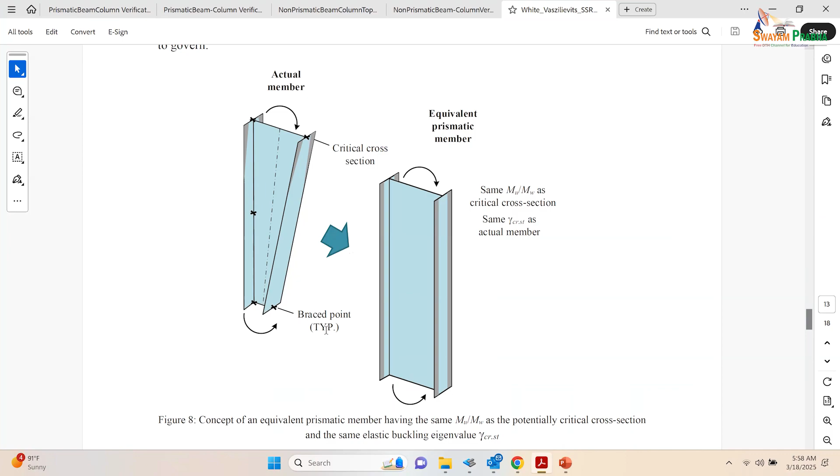We were just talking about this concept, so this graphic may help. Here's a hypothetical non-prismatic member subjected to bending moment, just showing bending moment here, no axial compression. It's got whatever bracing conditions, displacement, boundary conditions are coming in from the problem you're solving in general, and we need to identify a critical cross-section. Let's say we've got something like the member we've just been working on.

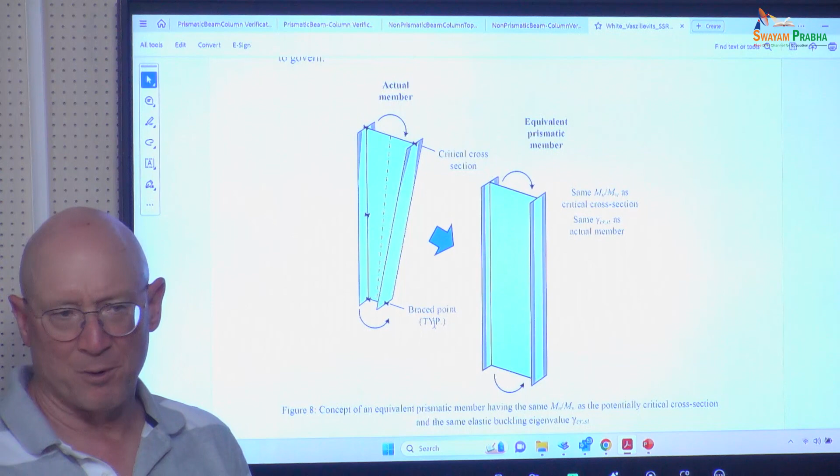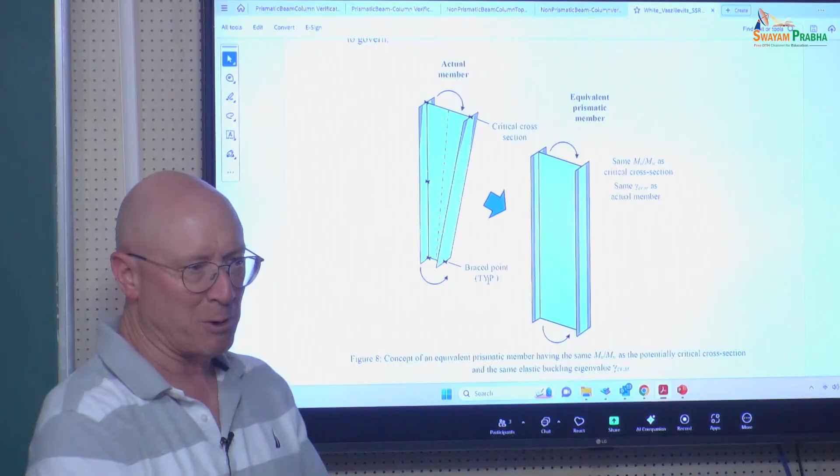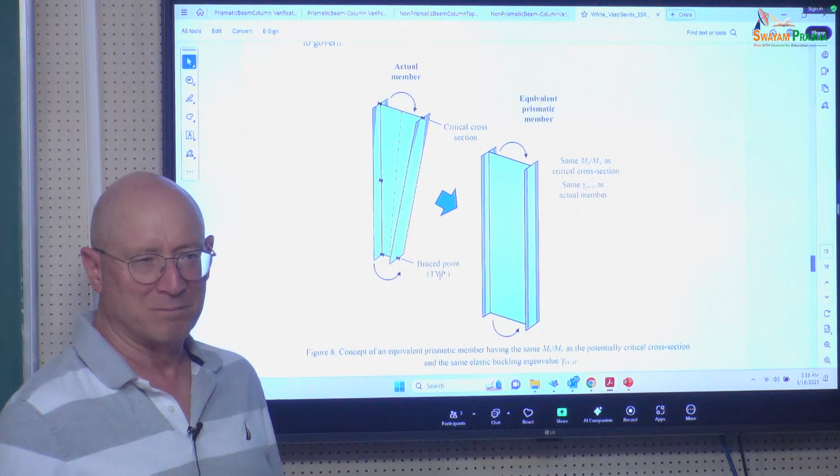We would expect that it's probably critical at the top. Now, in Consteel, we're using a rule where we're basically looking at the ratio of MU to MW for all the different cross sections, and we look at whichever one is largest. We take that as a critical cross section, move it forward, and that does a pretty good job of capturing the one that's going to be the largest.

In Design Guide 25, we would say, well, you've got these various potential locations that may be critical, please check them all. So once you identify a cross-section you're going to check, let's say you think the top is most critical here, you basically say, okay, what's the MU to MW at that cross-section? That's a cross-section demand to capacity ratio, or cross-section utilization if you prefer that term. Obviously we've got to do some calculations given that cross-section to calculate MW.

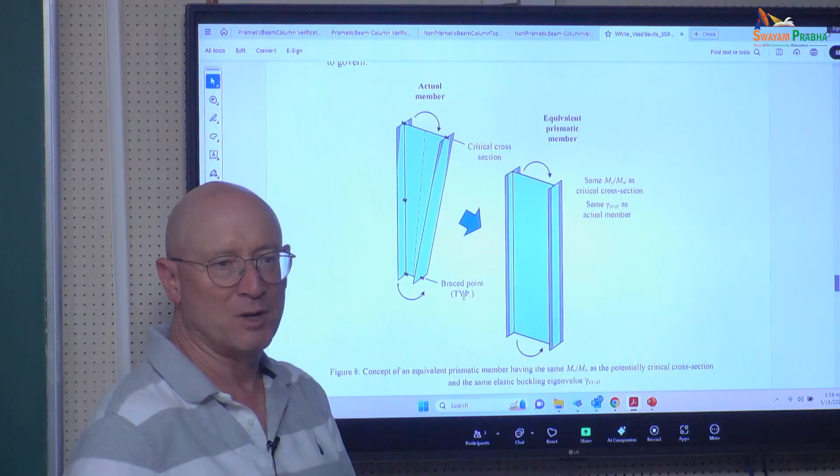That's the plateau strength we were talking about. We've also got an elastic buckling eigenvalue, gamma critical, that brings in the entire member. So you can see from what we just did, when we tapered the member, our gamma critical reduced because it wasn't as strong in terms of lateral torsional buckling.

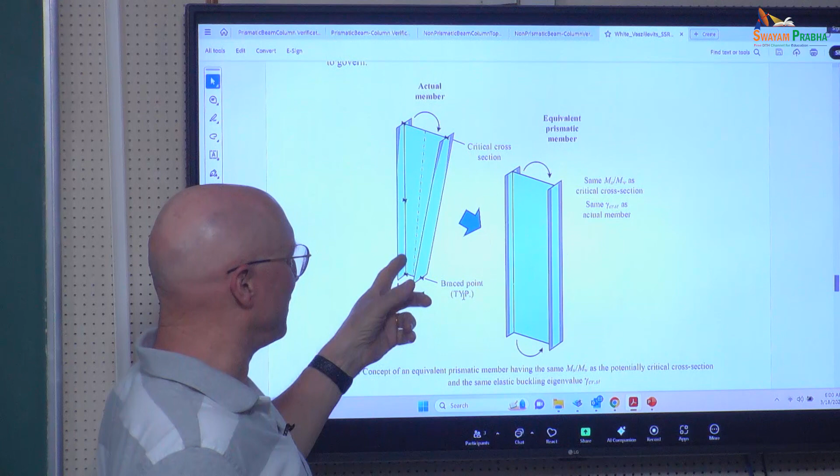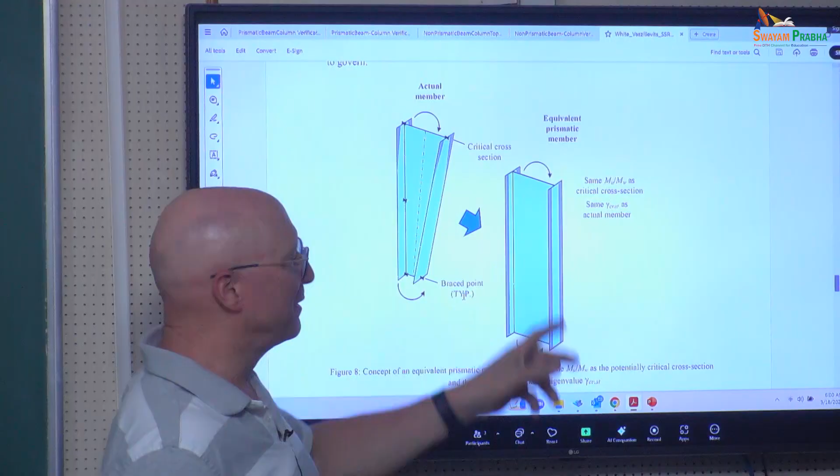Once you have those two parameters, it can be non-prismatic or prismatic. The way the AISC standard or other standards work, they're usually written just for prismatic members. So how do we use that standard if it's a non-prismatic member? Well, we can basically set up and show that if you're checking a prismatic member, if you know MU to MW, and if you know gamma critical, you've got all the information you need to calculate MU over phi MN.

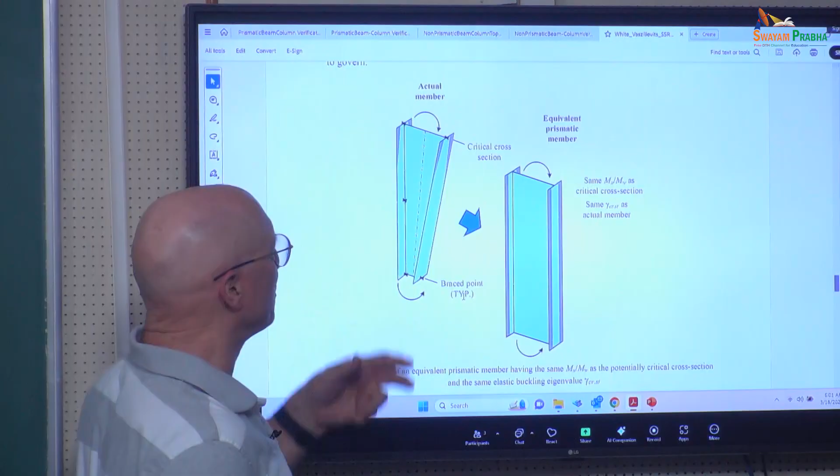That's how we can check a prismatic member. What's the equivalency we're going to use for a non-prismatic member? We go to a potentially critical cross-section, we determine the MU over MY at that cross-section, we get a gamma critical for this non-prismatic member, and then we're not going to try to define what's the length or anything of that sort in the equivalent member. We're just going to say we want to check whatever prismatic member has the same MU to MY and has the same gamma critical.

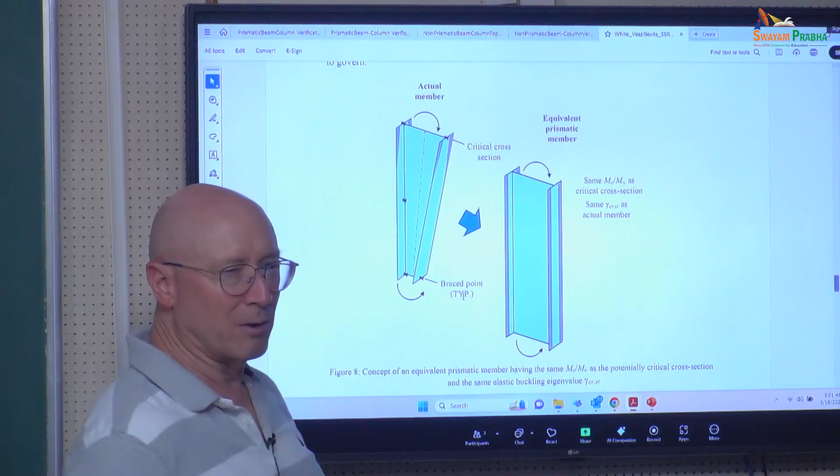That's how we apply the specifications, equations, to get a calculation for that cross-section. Then in general, we go to other cross-sections that might be critical, and we check those the same way. Does that make sense? It's a very simple concept, but it works quite well.

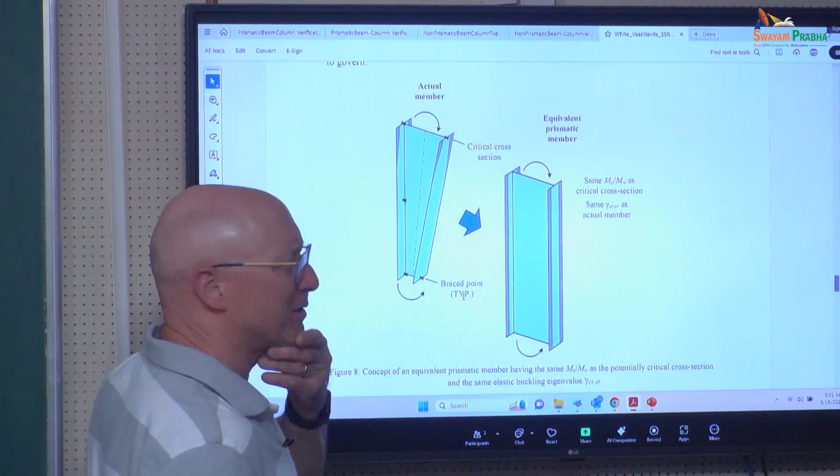I've been asked questions before, well, wouldn't that be conservative? You kind of maybe got something that's more local, large demand here, but the rest isn't so heavy of a demand. Wouldn't that be kind of conservative to now say I'm checking a member that's uniform? It actually works quite well.

So there's a general folder, and this is the 2025 paper by White and Vaszilievits. It's for the SSRC conference that's coming up.

Let's go back to Consteel for a second. So now we've got our prismatic member, and we have both axial compression and flexure. The axial compression is constant along the length. The moment is varying from maximum at the top to 0 at the bottom.

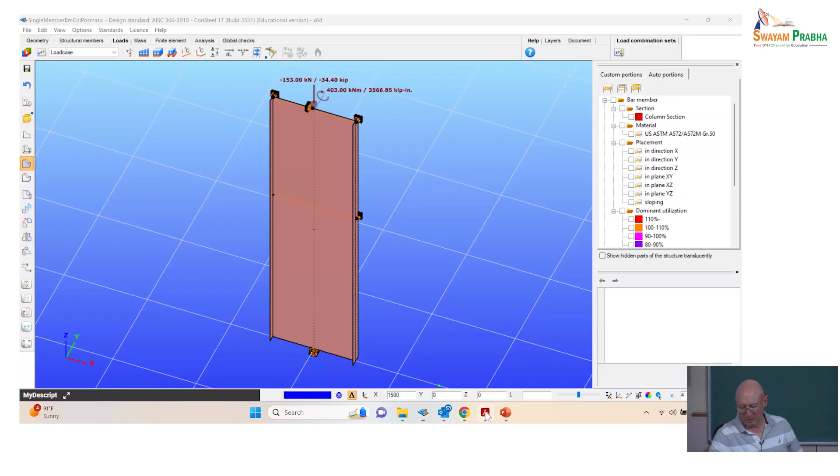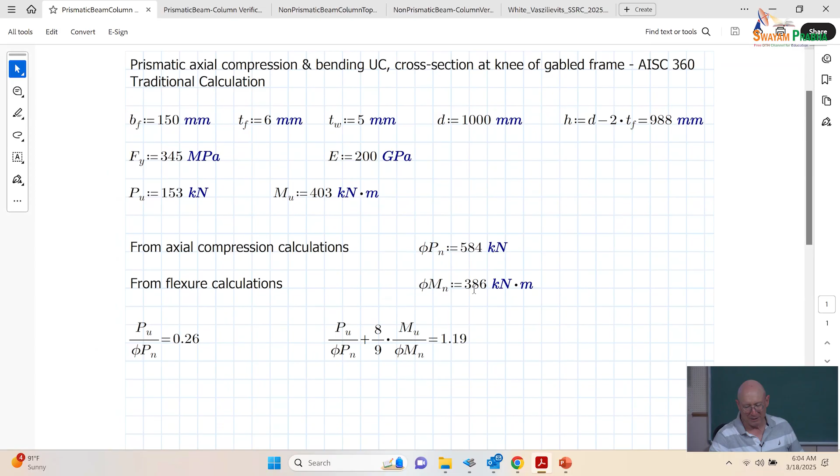So how would we verify the strength of this prismatic member? If we look at a traditional calculation - here's again the 1,000 millimeter deep section. We've already done the calculations for PU and MU and got a phi PN and a phi MN separately. Our PU over phi PN was 0.26. That kicks in the upper branch of a bilinear equation that we use for the beam column strength. We're at 1.19. That's the way we do it traditionally.

Now, if you stop and think about it, it wouldn't be that hard for something like this, where it's just a single isolated member that we've taken out from everything else. So now we're going to go through a lot of extra effort to analyze this member under pure axial compression. Then we're going to put in more effort to analyze it for just bending alone. Then we get those capacities, and then we can interact them. So that's the traditional approach.

Obviously, if you're doing hand calculations for those things, yeah, it's easy - it's difficult to do anything else. You want to know the column capacity by hand, you want to know the beam capacity by hand, now let's get an interaction that ties them together. But if we're using a tool like Consteel, that's extremely awkward. It's like, wait a minute.

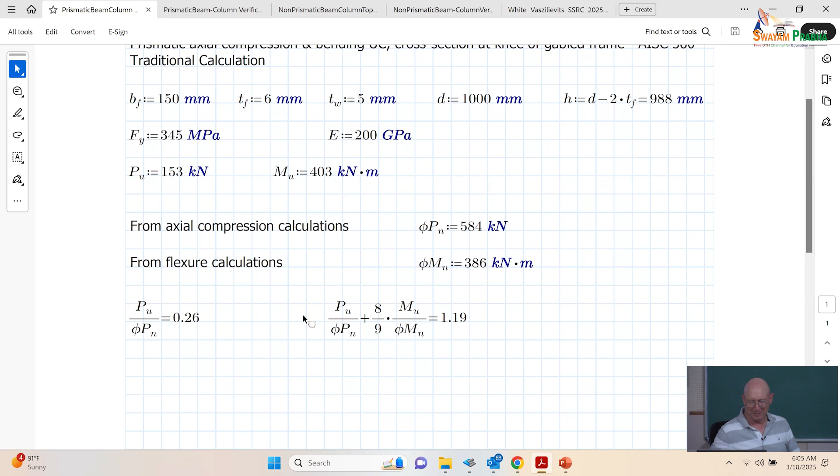If we've got combined axial compression and flexure, why don't we analyze combined axial compression and flexure? Why are we doing them separately?

So let's analyze them. We run the analysis, and this is a buckling load. It's buckling at 3.85 of the design load for these two loads that are applied. It's a lateral torsional buckling under combined compression and bending, and an eigenvalue.

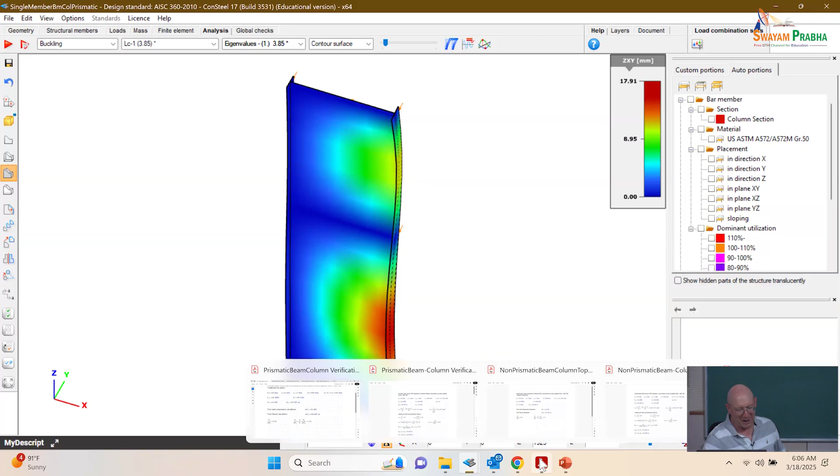All right, how do we do a design with this? How can we use that in design? The general method. So now what I want to show you is basically how that works, and then we'll do a summary. This is for just the prismatic beam column. We can then look at it for the non-prismatic case.

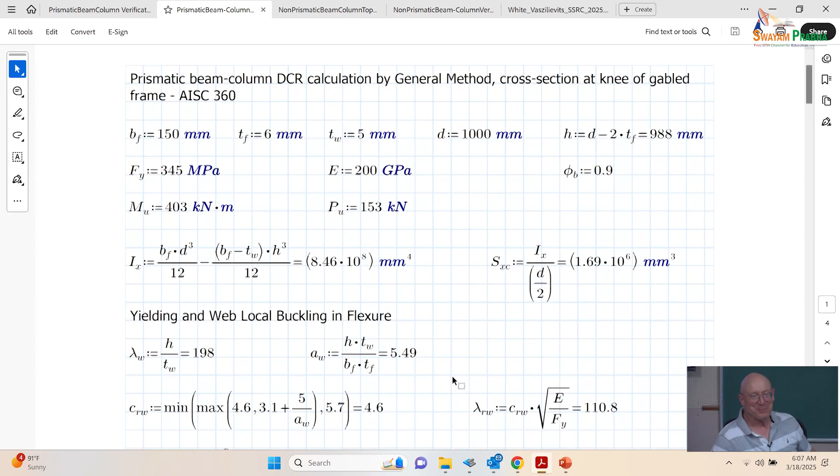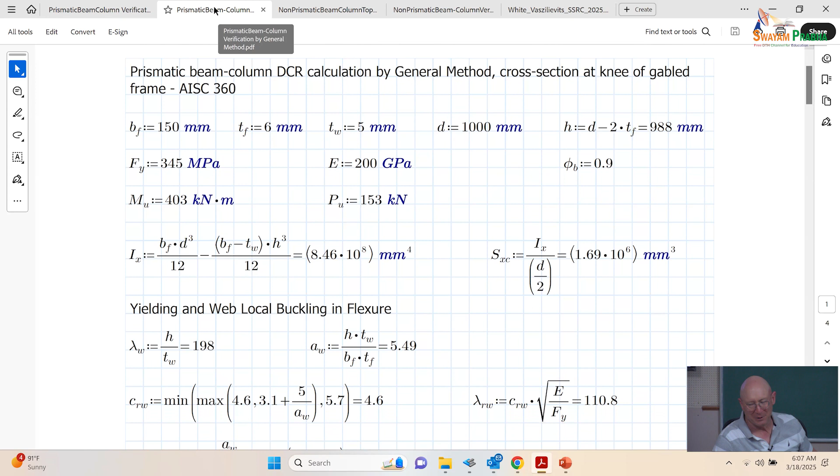The calculations should be starting to look rather familiar at this point. You say, boy, I think I've seen that on a previous PDF. So this is prismatic beam column verification by general method, in the folder that's for Module 4, Behavior and Design of Beam Columns and Frames.

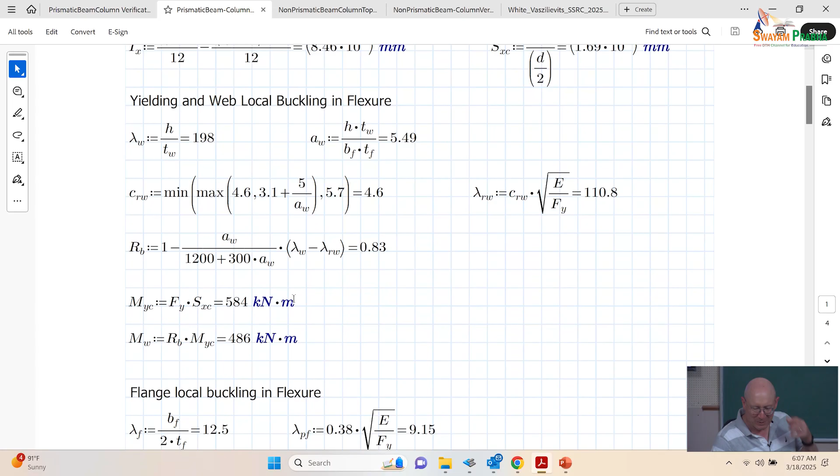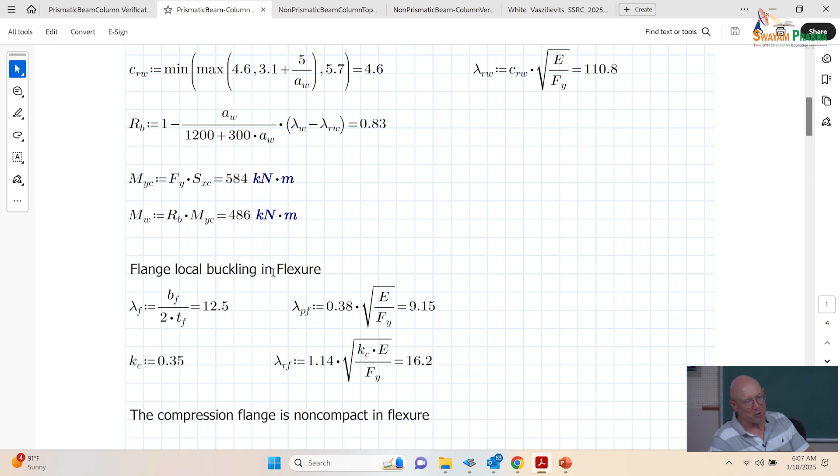So we got some section properties. That's nothing new. We got our lambda W, our A sub W, we got our CRW - that's the same calculations we were doing before. RB looks like that's 0.833, I meant to do 3 significant figures there. That's pretty much repeated out of what we have already done. It's not that we're going to redo all those previous calculations here - let's say you're doing them for the first time here.

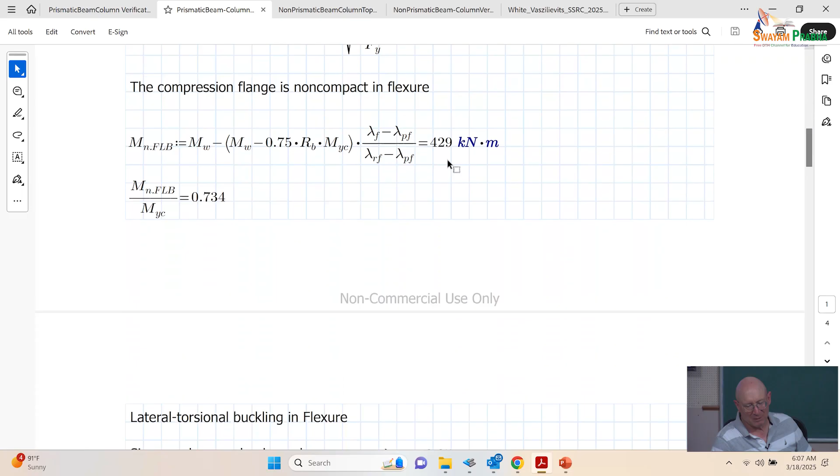Flange local buckling in flexure - okay, this is the same as what we looked at before, 429 for the flange local buckling strength. Lateral torsional buckling in flexure - okay, same lambda P, ML, lambda RLT, that's the same.

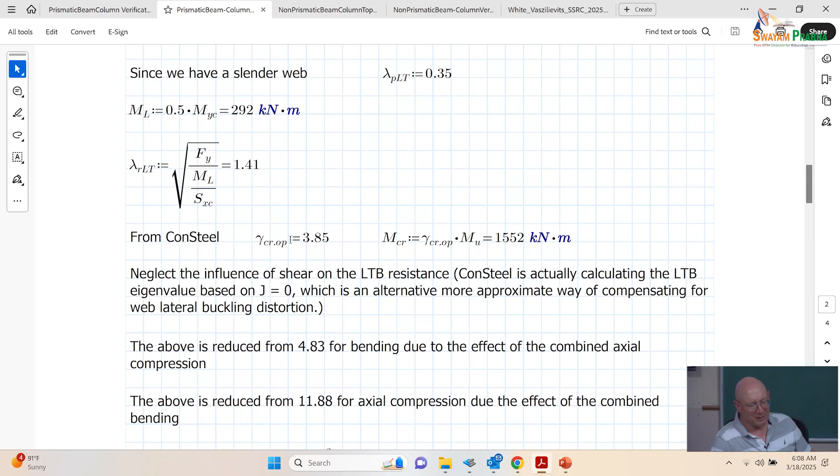Wait a minute. Was it 3.85? I hope it was. Yeah, 3.85, okay. So my gamma here is a gamma from combined compression and flexure. I'm multiplying my mu by that, so I got my mu at the strength condition. Now again, here we're using the approach that proceeds where we're going in the direction of always doing everything with a J, but then having to calculate a reduction factor for shear.

So that 3.85 - it was 4.83 when we just had bending alone, and it was 11.88 when we had axial compression alone. I think that was an earlier thing, and I changed it a little.

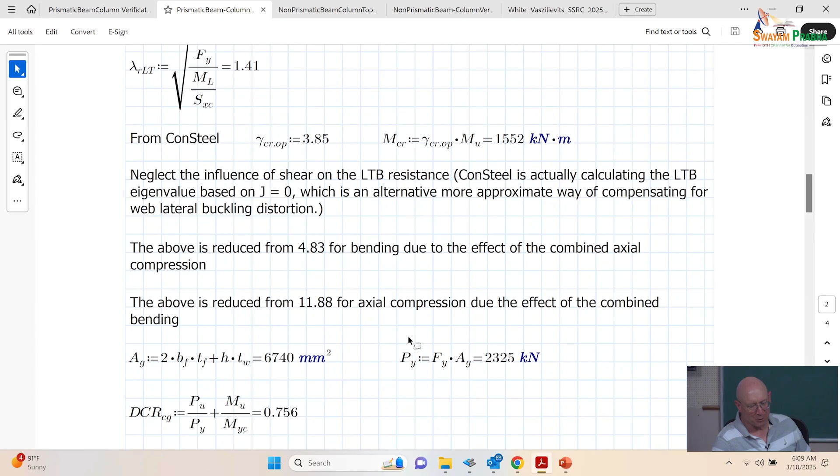All right, so we're not quite done. We need to basically also get our M criticals, given our load corresponding to critical load - we need to figure out the demand to capacity ratio under combined compression and bending.

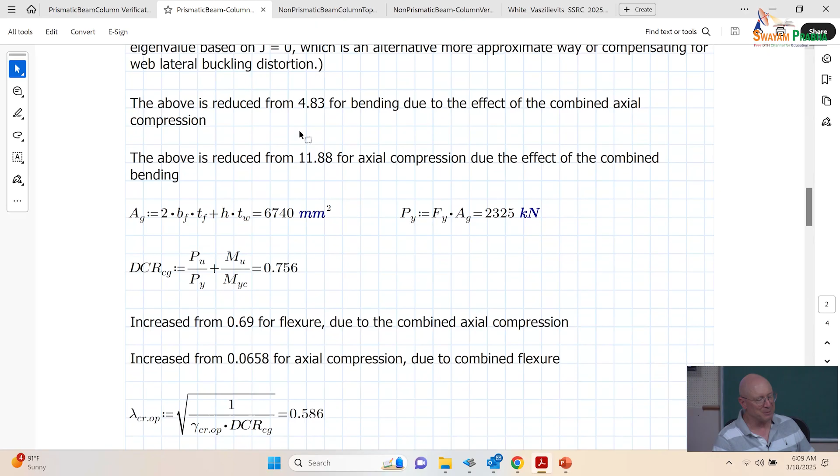So to go there, here's where I'm bringing in - okay, I've got a yield moment. I need to calculate a yield axial load. Py is Fy times the gross area. Okay, so we're going to get a gross cross-section demand to capacity ratio. Basically, this is a yield equation, right?

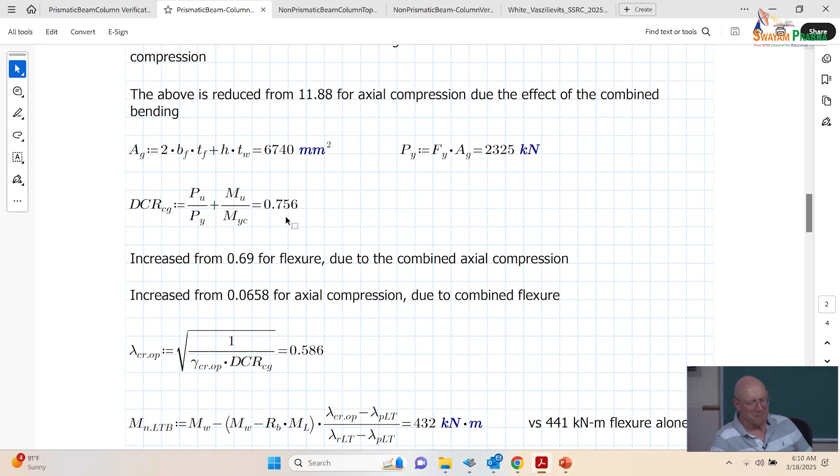This is increased from 0.69 for flexure because we've added axial compression. It's increased from 0.0658 for axial compression due to the fact we've also got bending.

Now we calculate an out-of-plane non-dimensional slenderness using our elastic buckling eigenvalue, gamma critical OP, for the out-of-plane buckling, and our demand to capacity ratio for the gross cross-section. So I've shown you that form of it earlier. We need to use it in this form now to cover the bases with the combined loading.

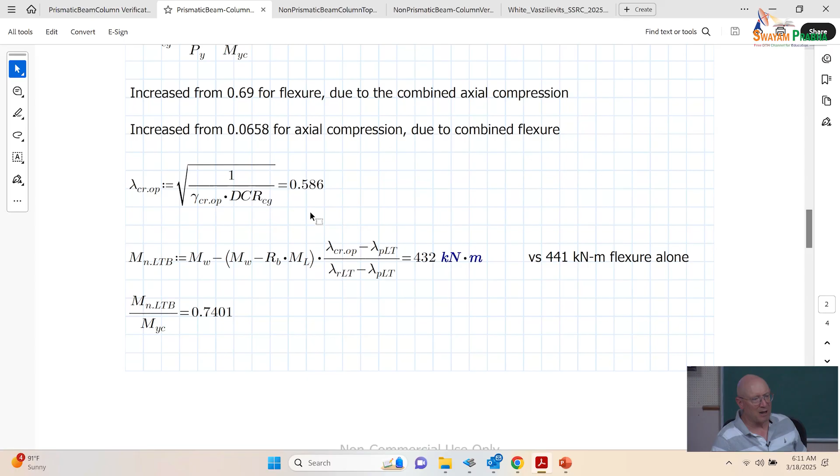We got 0.586. So now that slenderness is used in both the flexure calculations for lateral torsional buckling and the column strength equation for the column axial compression. So when I go to the LTB strength, I've got a lambda critical OP here where we had lambda LT before.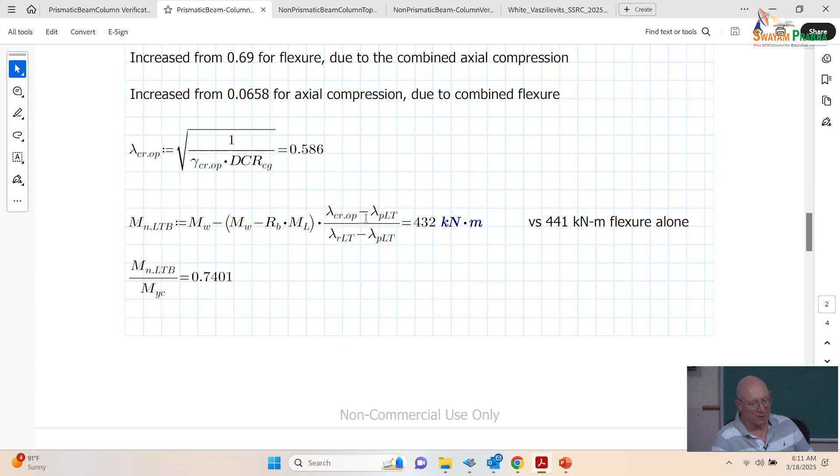So that's 432 now, where it was 441 when I had flexure alone. The ratio to MY is 0.74, if I just look at it as moment to MY. Here's my phi-M-n, which is the minimum of these. Now I thought I had... yeah, and I've got, I think - oh, this one's prismatic, so I didn't need to do that. Let's go to non-prismatic.

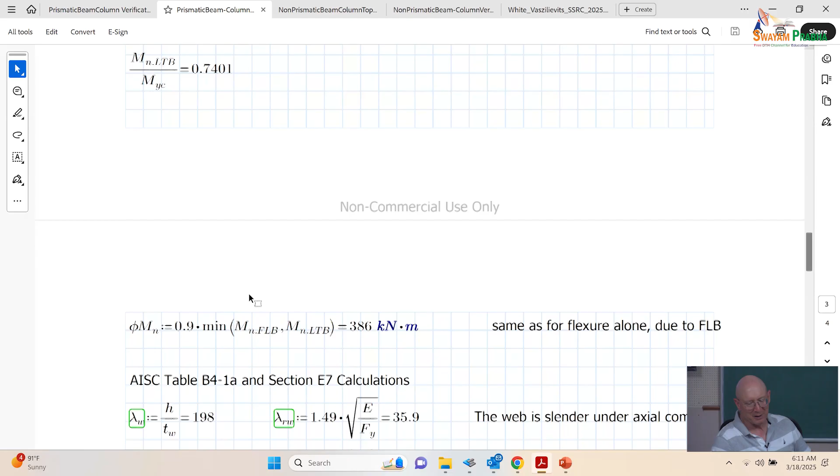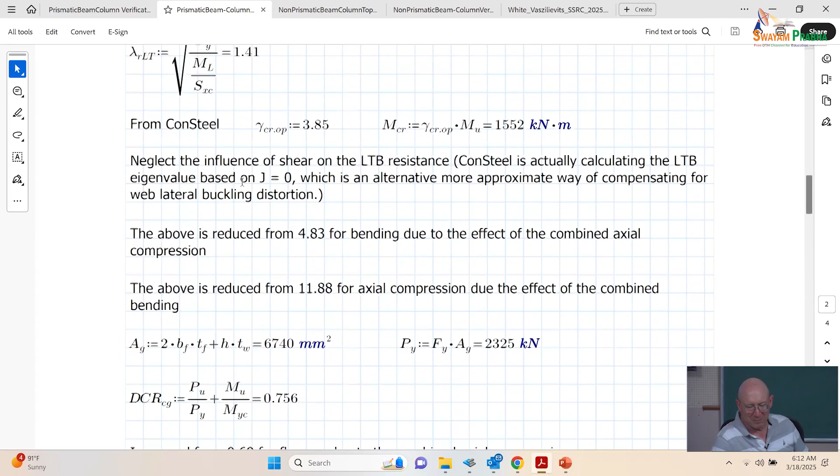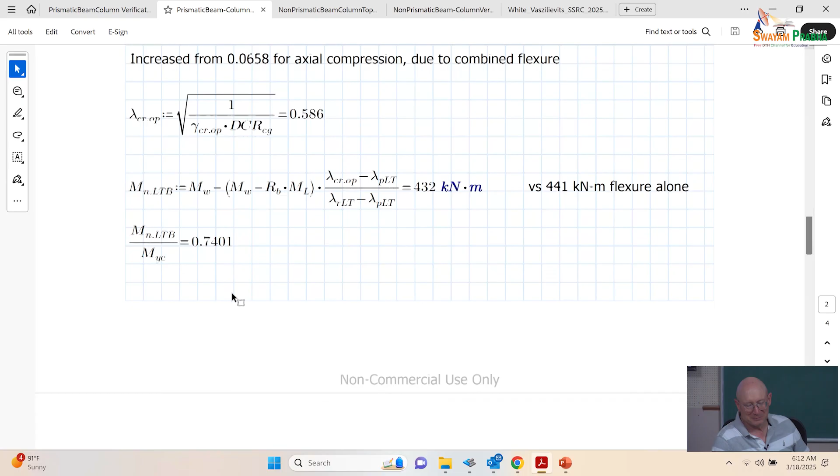Well, no, we still could have checked - still could have shown you where we are with respect to flange local buckling. So if I scroll up here, flange local buckling to MY was 0.734. And now we've got a lateral torsional buckling strength - that's okay, it's 0.74. So flange local buckling is still just barely controlling for this prismatic case. All right, so that's the flexure.

Now we've worked the column strength calculations. Again, we get a P critical out of plane by multiplying the eigenvalue by our PU. So now this is the axial load at elastic buckling.

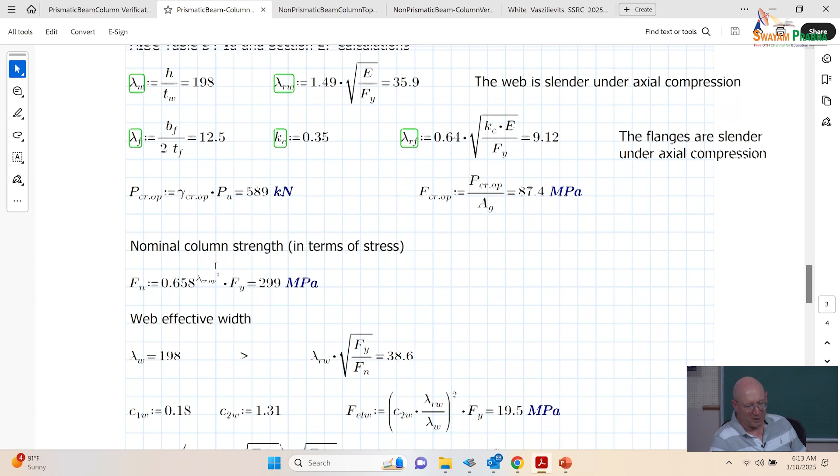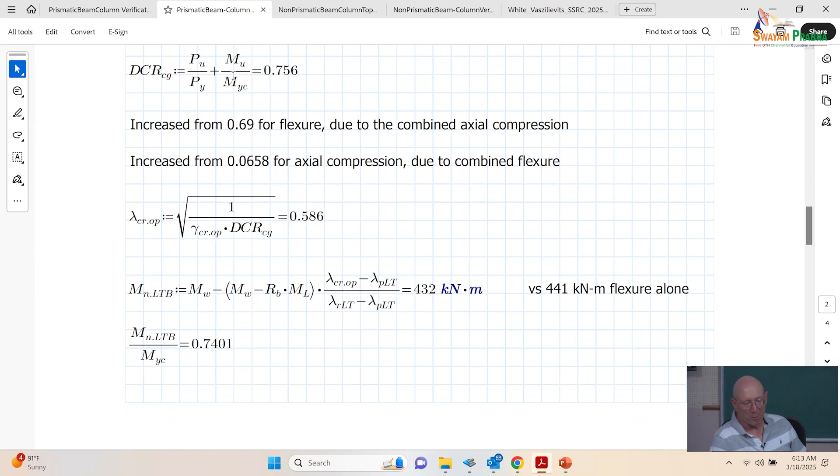We've already got our lambda critical out of plane. We did that above when we were doing the check based on this cross-section demand to capacity ratio that incorporates axial and bending. So we carry that into the column strength equation.

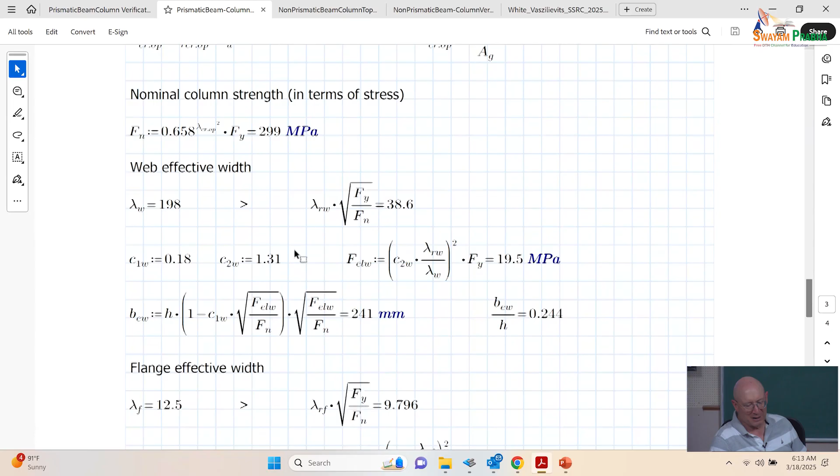And so now we get an Fn, then we use our Fn to calculate our effective widths, and we get an effective area. We get our column capacity. It's now 744. It was 584.

And then we now can take our phi-m-n and our phi-p-n that we've just calculated. The Pu over phi-p-n is larger than 0.2, so this form of the bilinear equation applies. We get 1.13 versus the traditional check, which is 1.19.

Now in the traditional check, we usually take the demand to capacity ratio Pu to phi-p-n, and if you go back and look at what we did, it was at the very bottom of the section. And now we say, oh, but the moment is up at the top. Do we really think those are that closely related?

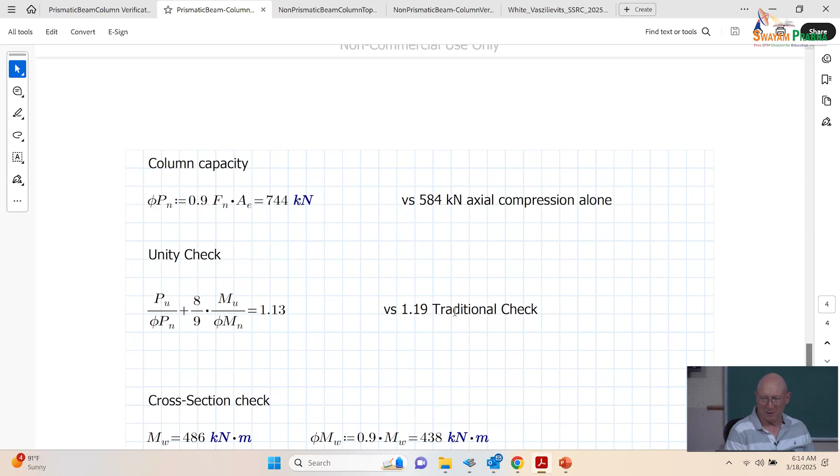And so that's a loose argument for why the general method is giving you a better representation, and it's allowing you to take advantage of various attributes where, with a tool like Consteel, you can capture various continuity effects in the structure and various complexities of the geometry.

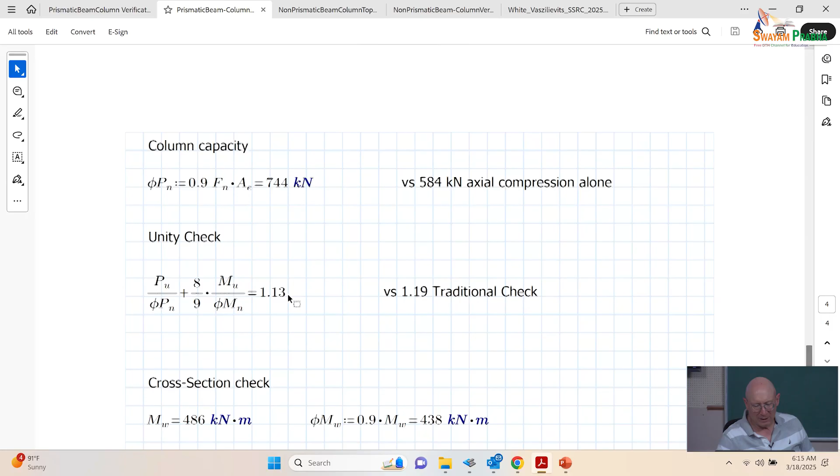Now in terms of the cross-section check here, again it would be an MW for the flexure and a PNS. PNS is based on the effective area that we get using an FY basis for effective widths.

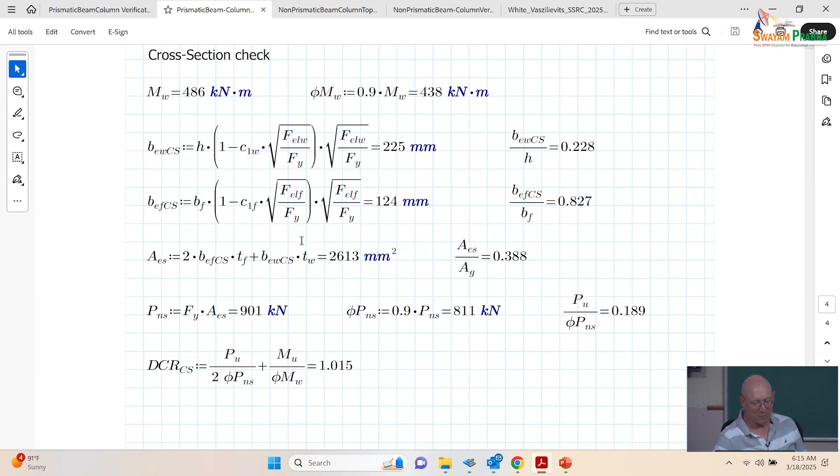And so in Consteel, the calculation is looking for basically calculating this for all the cross sections throughout the structure, and then identifying where the cross section demand to capacity ratio is largest for a given member. We go there to then do the member calculations.

So that's prismatic. And I think maybe before we look at the non-prismatic, it may be good to basically walk you through what we just did, but more in a presentation form of the steps.

Step one is generally we're going to perform an in-plane geometric nonlinear second-order elastic structural analysis with imperfections or equivalent notional lateral loads.

Notional loads. Now, per AISC 360, they say, okay, that means use the direct analysis method rules for the analysis model. And so the mantra there is a 0.8 stiffness reduction on all elastic stiffness contributions, and if it's a frame, out of plumbness of 1 in 500. That's the erection tolerance, maximum erection tolerance on out of plumbness in a frame. And if we get into some other things, we might need to talk about out of straightness and so forth.

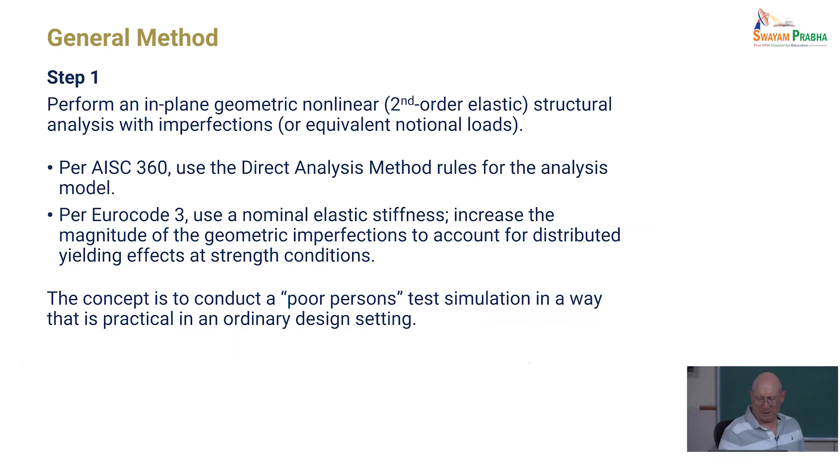So once we have step one accomplished, we move to step two. And so with the way that it is implemented in Consteel, we determine cross-section demand to capacity ratios throughout the structure. And we identify, the designer identifies, okay, I want to call this a member, this a member, this a member. And then we look at, well, where is the largest

DCRCS, so that's based on PNS and MW. PNS is based on effective width based on FY, okay, same as in Eurocode. So we identify a critical cross-section based on that, and we say, okay, we've got our critical cross-section now, we're going to do our member check just on that cross-section. Whereas Design Guide 25 would say, oh, you may have these 4 or 5 cross-sections that are critical, please check them all for the member.

Now, in the calculation of the non-dimensional slenderness of the member, we need a gross cross-section DCR, so that's the bottom here, DCR CG, for G for gross. So that's step 2.

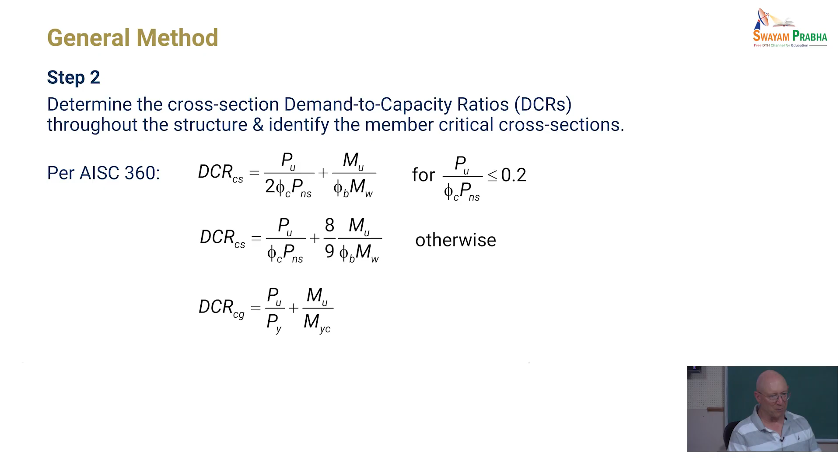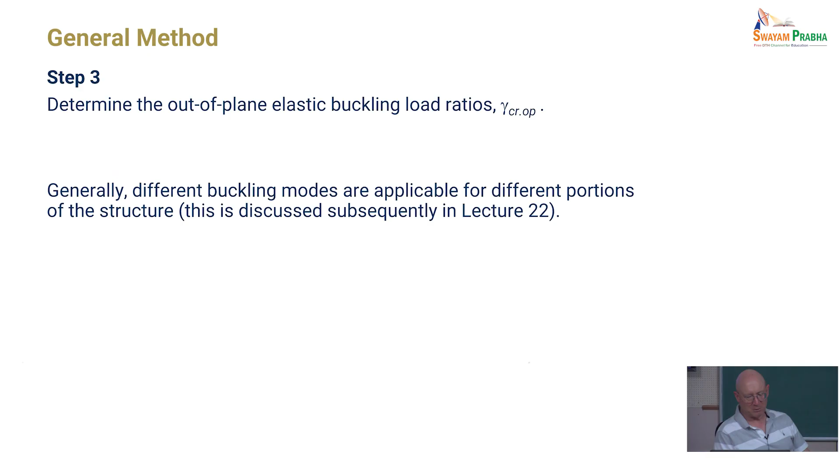Step 3, we determine our elastic buckling load ratios for out of plane. And so generally different buckling modes are applicable for different portions of the structure. And so Balint is going to discuss that in a subsequent lecture, how we deal with that.

Then step 4, we calculate the applicable member out of plane non-dimensional slenderness values. So I've got lambda OP, or lambda critical OP, square root of 1 over gamma critical OP over my DCR for the gross cross section. So given that, that gets entered into the Pn equations and the Mn equations, and we get axial compressive and flexural strengths.

And now we're ready to wrap it up. We calculate the member demand to capacity ratios, and per AISC, we use this bilinear strength interaction equation.

In the bridge standard in the US, with the fairly major updates we developed there for handling big box sections and all kinds of things, quite honestly, the bilinear equation in AISC 360 is a bit of a cheat when it gets to cross sections with very thin webs. The better interaction equation is really just the linear interaction equation for that, and we're pointing that out in the paper I was showing you the figure from earlier in this session. It's pointed out in the bridge standard that if you've got a slender web, you should use the linear interaction equation. It's not a big difference one way or the other.

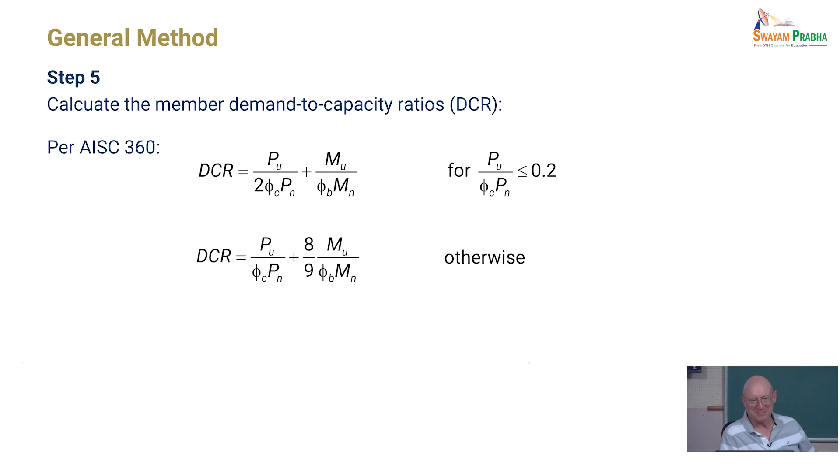So there's a lot of these things where it's easier to just keep cheating. It doesn't change it that much, and I can't have another argument with you about it. Okay, so that's it. That's how the general method works.

So let's go back and look at the non-prismatic beam column. Now, traditionally, and in Design Guide 25, we would say, okay, carve out that member and do a special analysis. You've got to build a whole special model for this, loaded in concentric axial compression.

I had a good question during the break: wait a minute, if in some of these cases it's non-prismatic, don't you put axial force on it and get some bending because of the non-prismatic geometry? If you've got steps or transitions and so forth, you can't actually put axial compression on it without causing some bending somewhere along the length.

So that ends up being a huge headache. We kind of contorted ourselves all sorts of ways to address that question in Design Guide 25. You put on these notional loads and then you can take that bending out, and now you've got pure axial compression.

If we've got something like what we were looking at here, it's just a nice linear taper, so there's still no bending introduced when we put axial compression on it. So we can get an axial compressive resistance - we already got that earlier - and we can get a flexural resistance, and then we put it together.

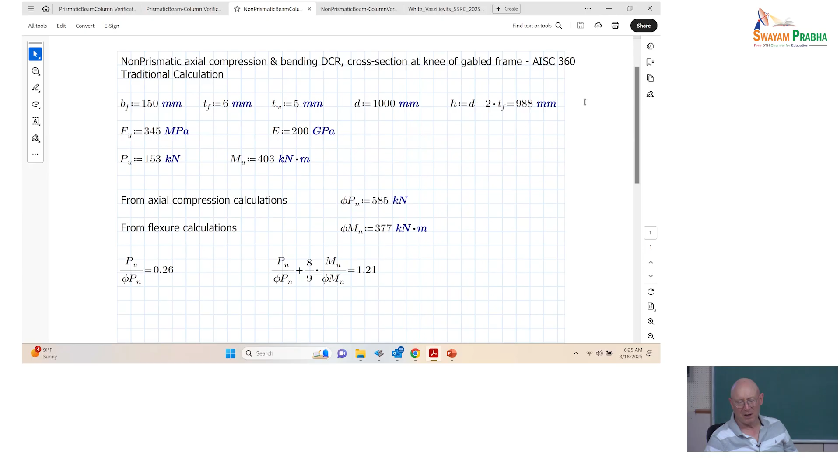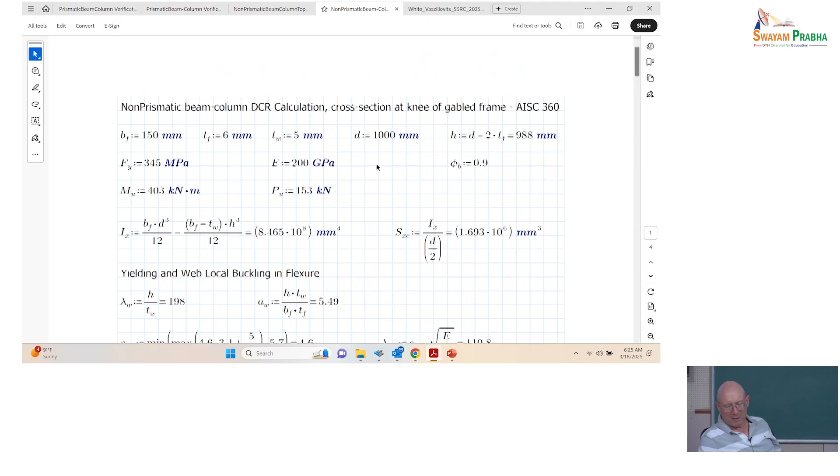If we want to drink the Kool-Aid with the general method, again, there's a lot of things that are going to look very similar here. So maybe if we repeat this enough times, you've got it memorized. At least this column you can do.

And then we're going to change it and say, okay, how can we make this - how can we handle this frame under a higher wind load, and how can we address the fact that it didn't quite work before, and make it lighter, or less, or more cost effective.

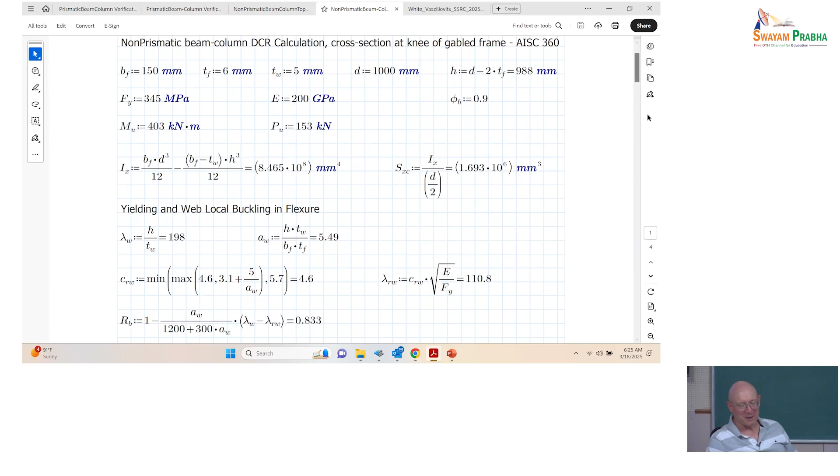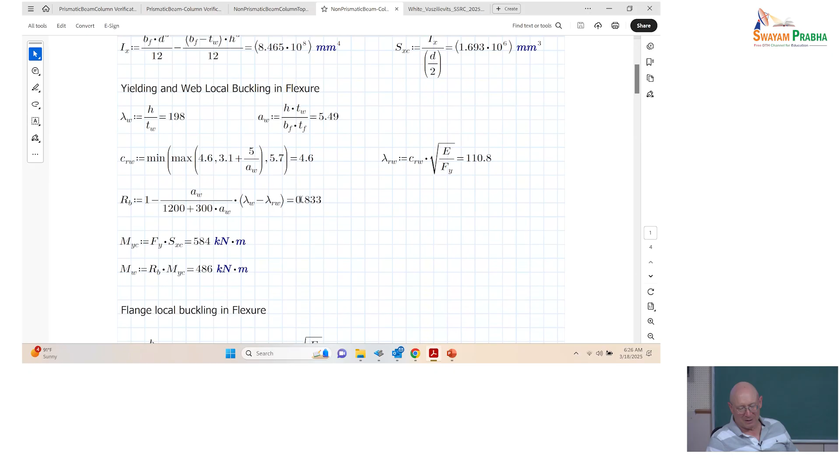Okay, so we've got yielding and local buckling in flexure. We got our RB showing up there again, our MYC, our MW. Okay, we got our plateau strength. We got our flange local buckling check in flexure - that's a repeat of what we had before.

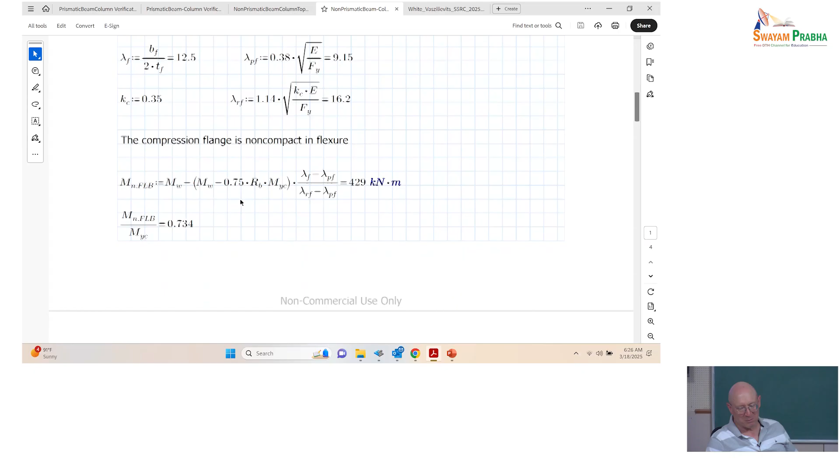Okay, lateral torsional buckling. Again, lambda PLT is 0.35 since it's a slender web - it's always a constant. We got our ML, our lambda RLT, that's square root of 2. ML is half of yield moment.

Oh, but wait a minute. We go back over here. Here's the column in ConSteel. Again, I've got a lateral load and a vertical load here to give me the correct vector component along the centroidal axis at the top. And then our applied moment will come in.

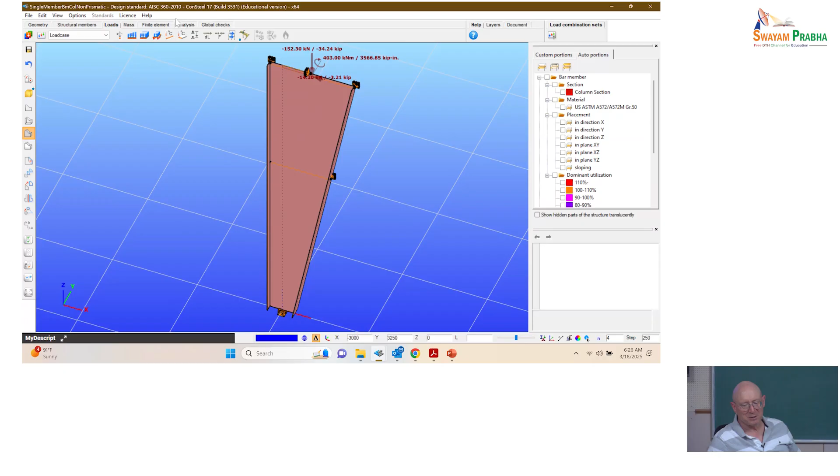We'll analyze this case, we'll get our buckling solution. So there's what the cross sections are doing in terms of the lateral torsional buckling. But it buckled at 2.85 - that's lower because of the combination of axial compression and flexure.

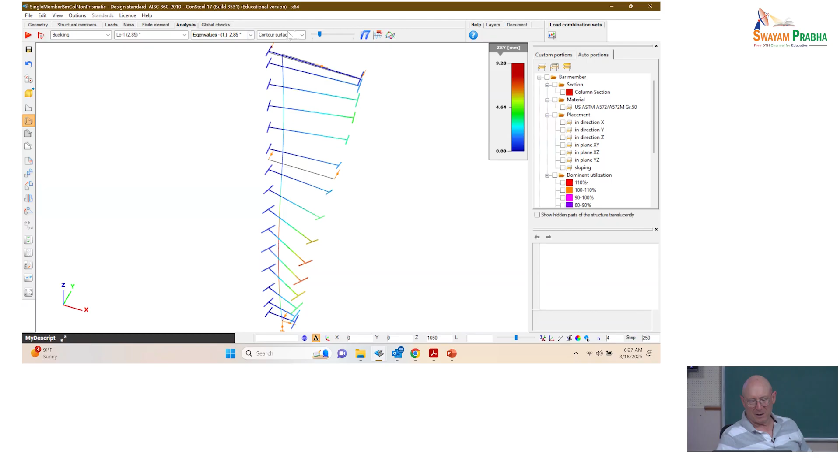You can see that we're getting still fairly significant action in the top unbraced length - that's where the moment is highest. And remember, these metal building frames, they're typically just glorified beams, dominant flexure. And what are we doing with the non-prismatic geometry? We're basically following the moment envelope and getting a more efficient design by following the moment envelope, but they've got some significant axial compression in them that we can't ignore.

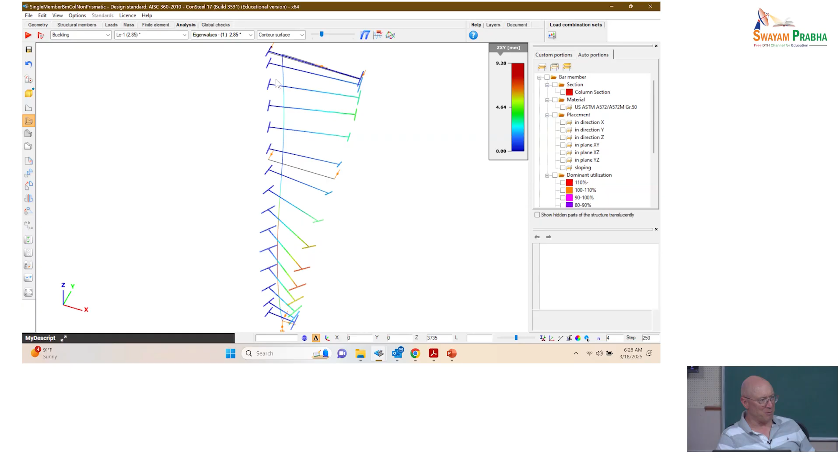So we've got to deal with that. Okay, so we got 2.85 coming out of ConSteel for this combined loading case. So there we have it - we're introducing that into the calculations here. So our moment at that buckling load is gamma critical times mu. Again, everything here is done with J equals 0.

So 2.85 was reduced from 3.47 from bending alone, or from 12.0 from axial compression alone. Now, again, we do our gross cross-section demand to capacity ratio. That's 0.756, increased from 0.69 for flexure and from 0.0658 for axial compression.

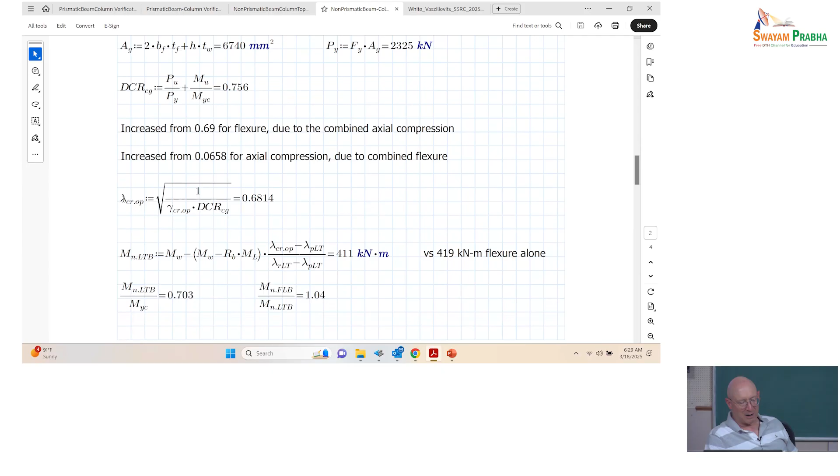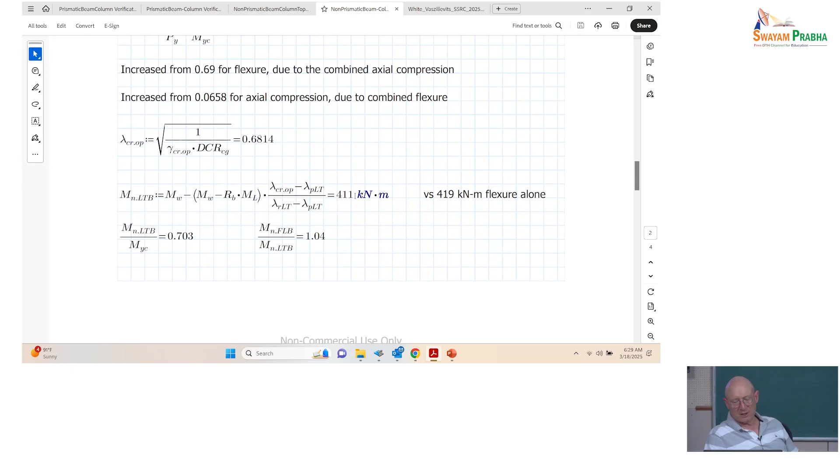We calculate our non-dimensional slenderness for the out-of-plane buckling. And now we're ready to calculate our moment resistance, using the non-dimensional slenderness that accounts for the combined loading effects. So we got 411. It was 419 when we did flexure alone.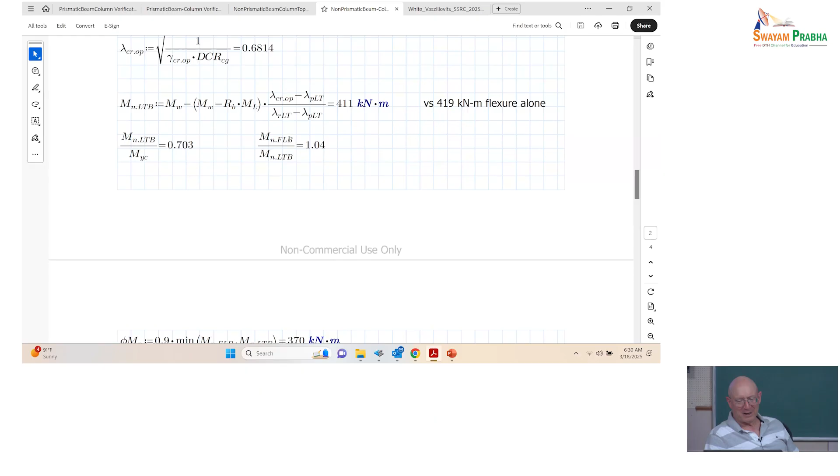I think I missed it in the other file, but here you can see, so now finally the lateral torsional buckling has been weakened enough so that flange local buckling is not controlling now. The lateral torsional buckling is the controlling limit state now on this tapered member.

0.9 M in LTB is 370. And we need to do the strength calculation for the axial part.

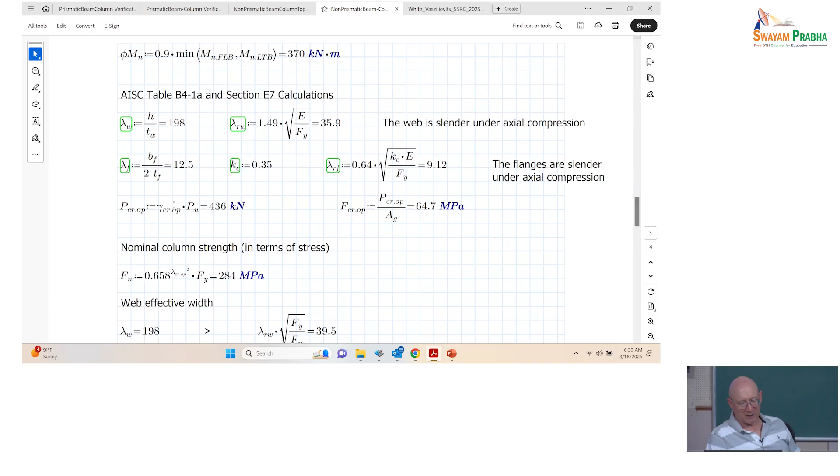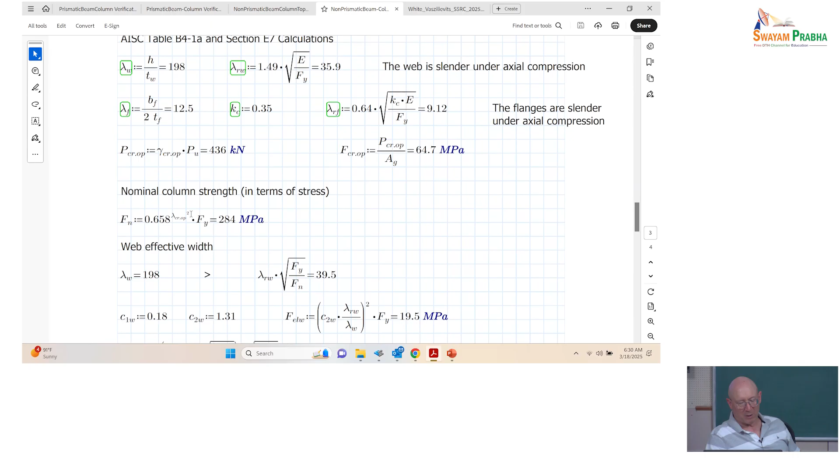So again, we bring our gamma critical out of plane in to calculate what's the axial force at that out-of-plane buckling. We've already calculated our gamma critical out of plane, so we plug that into the column strength formula. We get 284 megapascals for the stress.

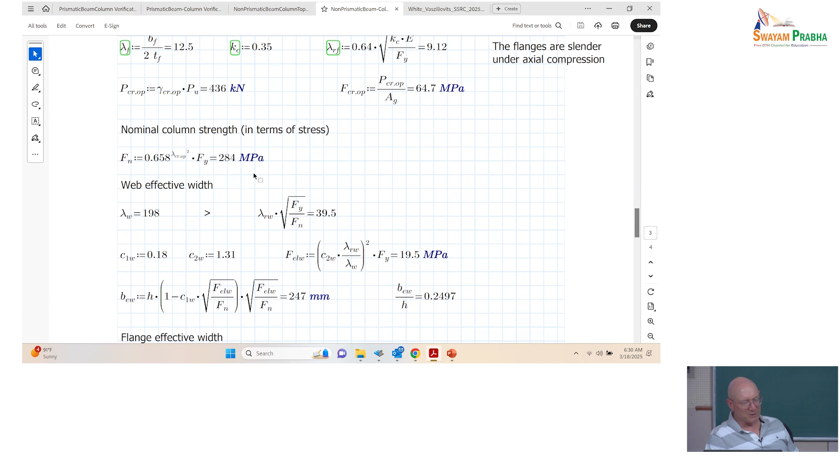And then by the approach in AISC, we're saying, hey, if this column is long enough, maybe a lot of my plates that are very thin become more and more effective. So we check, yeah, that really, really thin web is still not going to work as being fully effective.

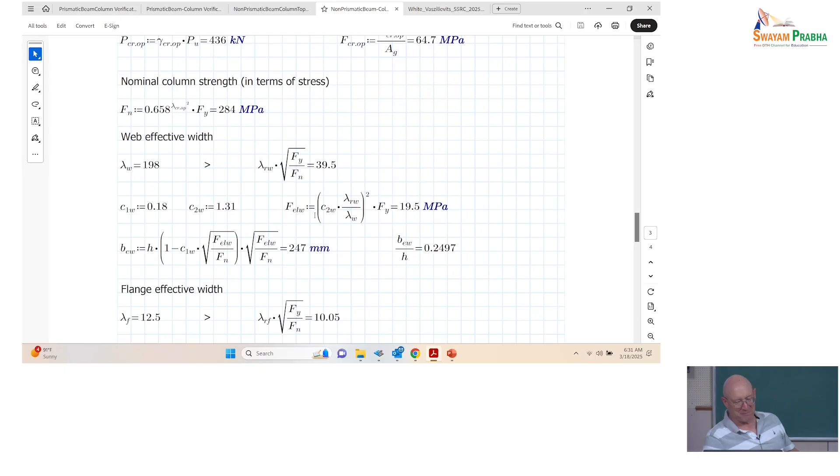So we need to calculate the elastic buckling stress for the web, get a web effective width. And so still only about 25% of the web is effective here for our strength calculation.

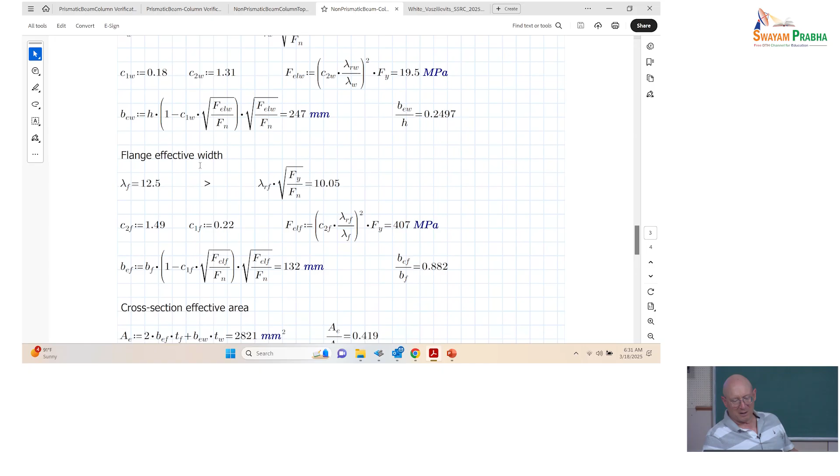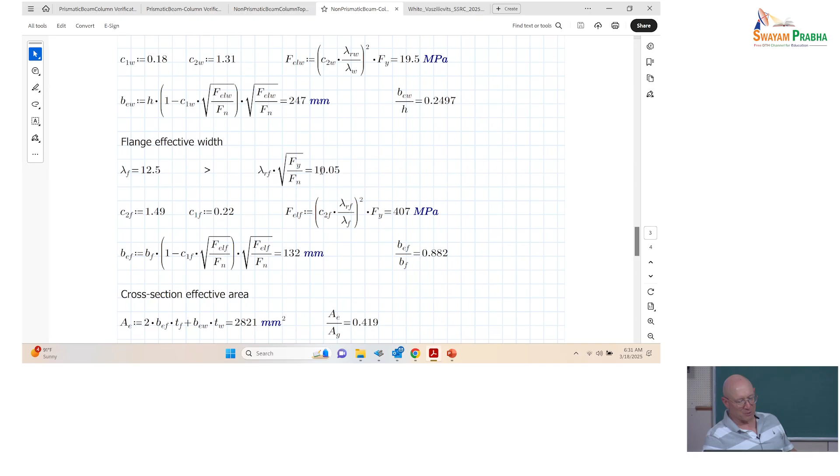The flanges, also the flange BF over 2TF is larger than this check, so we've still got some reduction we need to take for the flange. So we're losing about 12% of the flanges in terms of their effectiveness because of local buckling and the post-buckling action of the flanges.

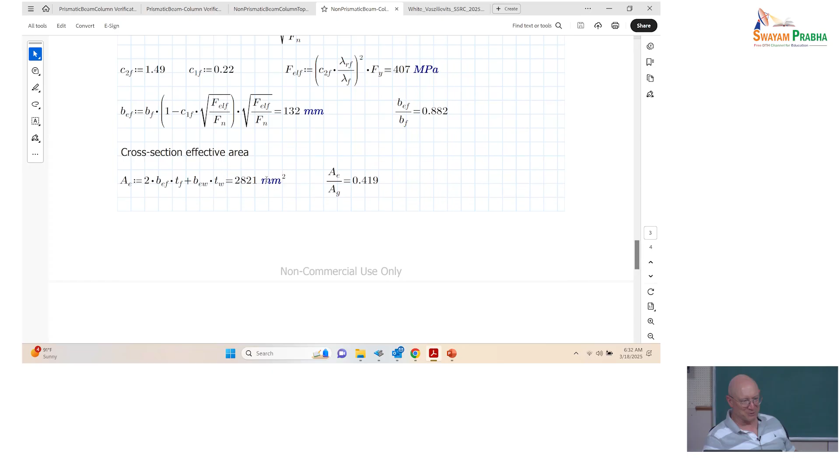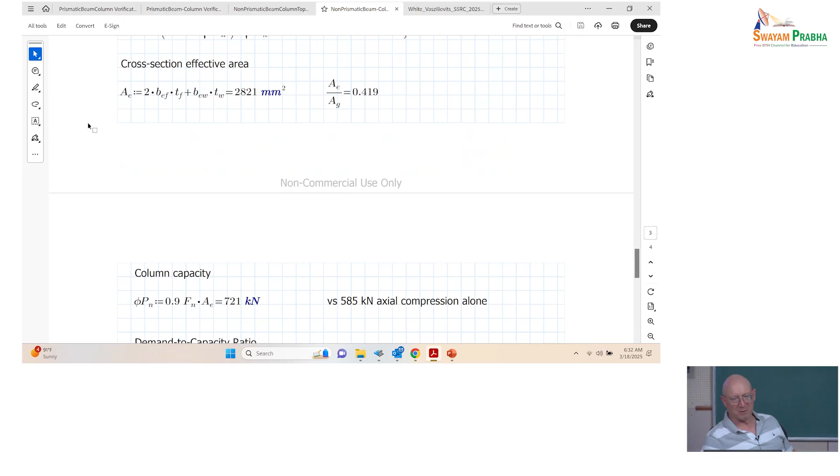We add up all our effective areas, and so again, this cross-section here at the top, it's one of the most severe in terms of really pushing the limits of local buckling and slenderness of both the flange and the web of any that I've encountered. But this is pretty much the cross section out of this particular frame from Professor Lee and Ketter and Hsu's design in this Metal Building Manufacturing Association book from 1981.

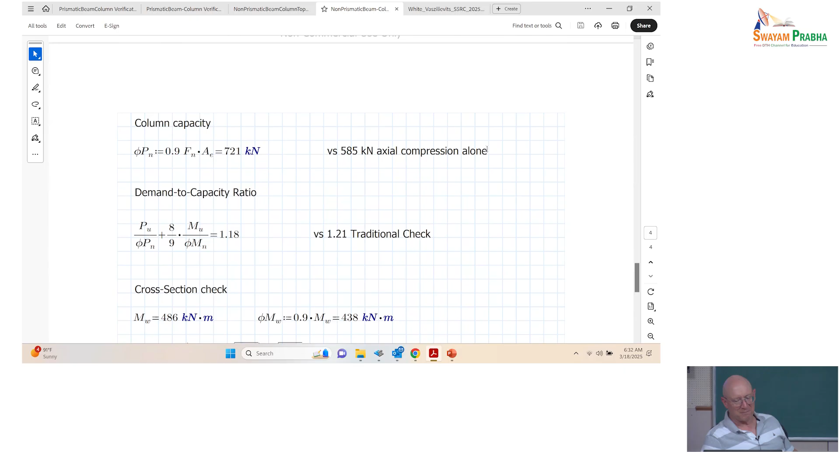All right, so the column capacity term ends up being 721. It was 585 for axial compression alone. We do the demand capacity ratio. We get 1.18, so 0.03 smaller than the traditional check.

Again, the traditional check, the axial was critical at the bottom. The moment was critical at the top. Really? Do we really need to combine those?

Well, we always say, I don't know how many software providers I've told, yes, that's the way you're supposed to do it. And then all the software providers go cross-section by cross-section and just look at what's going on for each one. You could say we're doing cross-section by cross-section things here, but we're doing it correctly. A lot of the calculations out there really don't have a basis.

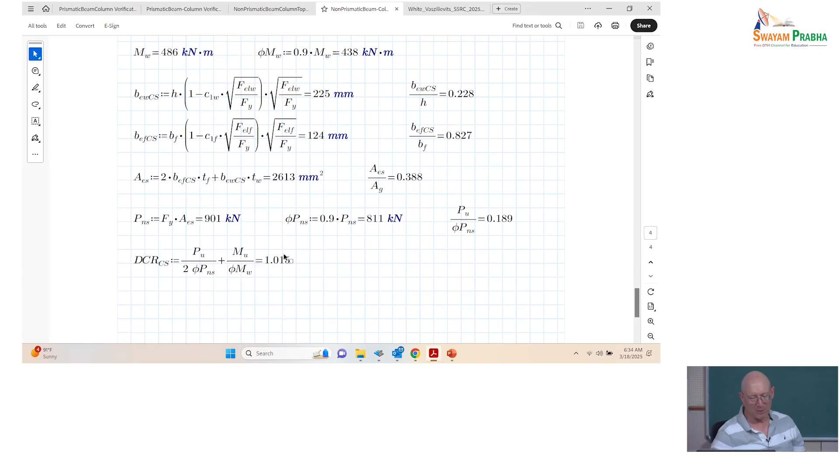And then I'm just showing the cross-section checks at the end here, where in Consteel, the cross-section demand to capacity ratios are used to identify, okay, it's not perfect, but it's generally pretty close. If we go to that cross-section, we've got that where the cross-section demand to capacity ratio is greatest. We then treat that one cross-section to evaluate the member strength for the member we're considering.

That's sufficient. We're done. Probably the hardest thing once we get to these, now obviously you can have it programmed in Consteel, and Consteel takes out the drudgery, or you have worksheets in the design office, and you run it through many times with all these different checks that you have to do.

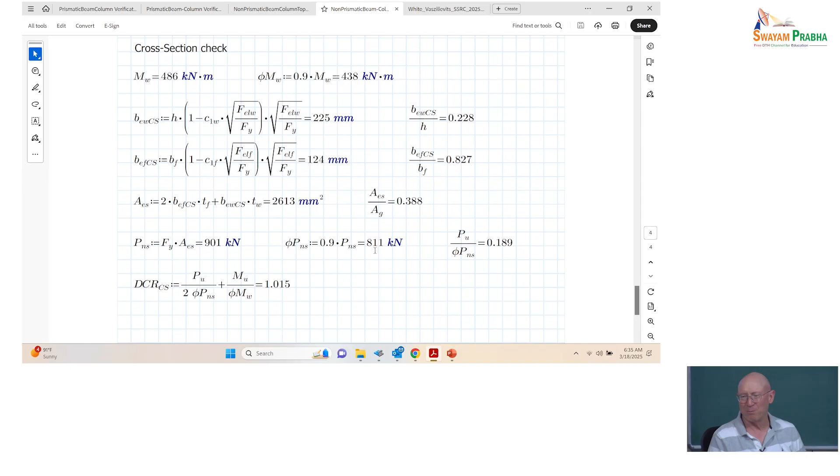But hey, if it's a non-prismatic design, you've got more checks to make. But you can say the same thing if, hey, it's a big structure. I've got 1,000 columns. Does that mean I only can check 500 of them? No, I have to check each one and make sure it works, right? So you've got more cross sections to check when you've got non-prismatic columns.

Okay, so I think that gets us to the point where we're essentially at our day 7, but we're going to take advantage of the fact that we're a little bit ahead of the game, and the idea is to get you started on grouping together and trying to see, okay, how can we make this particular design better? Before we get there, I think we need to understand, well, how do we model this frame? So that's what Balint is going to spend some time doing now.